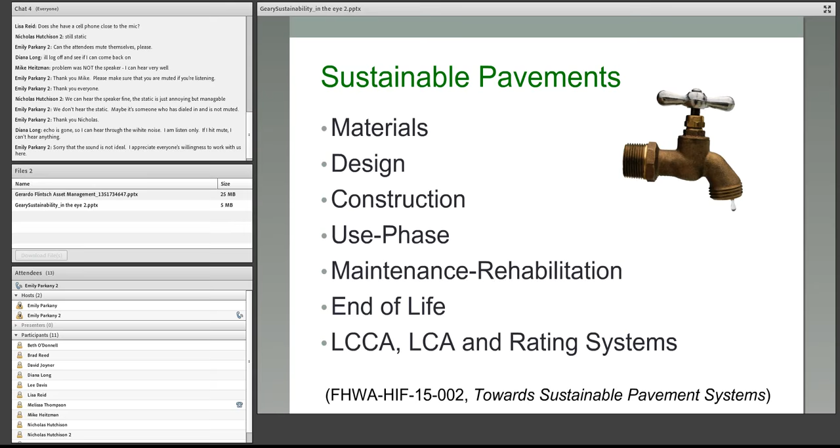This was something I thought was interesting, from chapter 10 on the future and environmental product declarations. I recently saw this in another presentation someone was giving in an asphalt arena, where they talked about UPC codes for materials in the future.

This is a concrete mix design and the environmental impacts for that design—looking at global warming, ozone, the whole environmental picture. As a materials person, I was a little concerned that they had only two lines for performance metrics versus over half a dozen lines of details and metrics for environmental issues. But this was just a snapshot—if you look at the full document, they do have the complete performance metrics too, along with more environmental impacts.

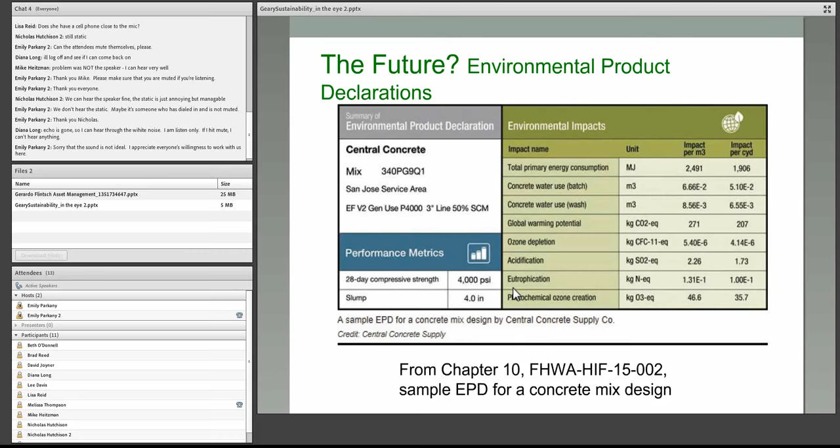Now I'm going to cover some examples. This is kind of like concepts according to Georgia, and I'll do this a little bit quick.

First, I think education and people coming up with new things, that's sustainable. The corollary is mandating specifics, which I think is detrimental. You really need to provide people options. Sometimes you've got to mandate things to get things done, but if you mandate options instead of just mandating one way, that's a better way to think about it.

We talked about how it can take time for sustainability, and then the context nature. When I took over the materials lab in 2000, we already had a standard saying you could use recycled concrete as a replacement for virgin graded aggregate base. But I couldn't tell where anybody had done it.

I actually saw a presentation somewhere else where a recycler was showing how to do it. You can't just recycle and throw it back in—you've got to process it, you've got to handle it correctly, there are steps that have to be taken. So I invited that recycler to come to our annual contractors meeting.

Just to kind of see if they would listen, I guess. And they did—boy, did they listen. The recycling increased that next year, and we were up to 500,000 tons. Now we're at about 100,000 tons a year, which is about 10%. For an aggregate-rich state like Georgia, 10% is pretty good—we have lots of aggregate, lots of good aggregate. We're taking a bite of that pie, and it was just based on education.

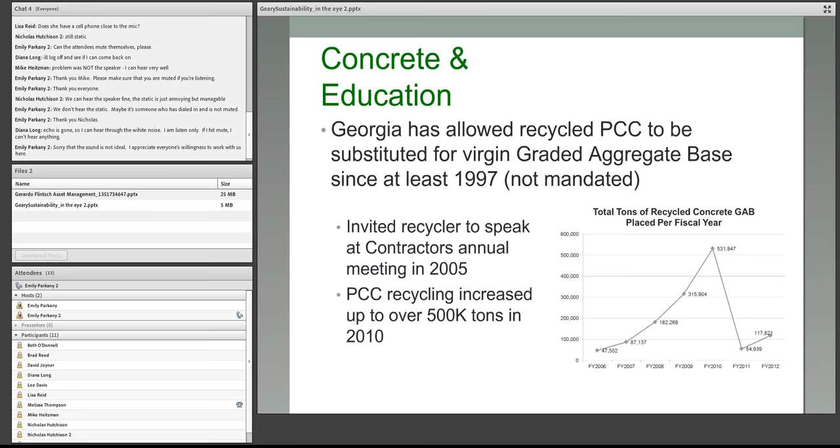Sometimes if you provide the contractors options, they'll come up with it on their own. On Interstate 16, they're out there right now recycling 100% of the concrete back into the shoulder pavement. We've never done that before in Georgia on an interstate. The contractor already had options for the shoulders, and they came in and requested this as another option.

We had the experience already with the concrete recycling on GAB. From what I understand, the project is going great. I'm actually going out there to see them next week to get a visit of it.

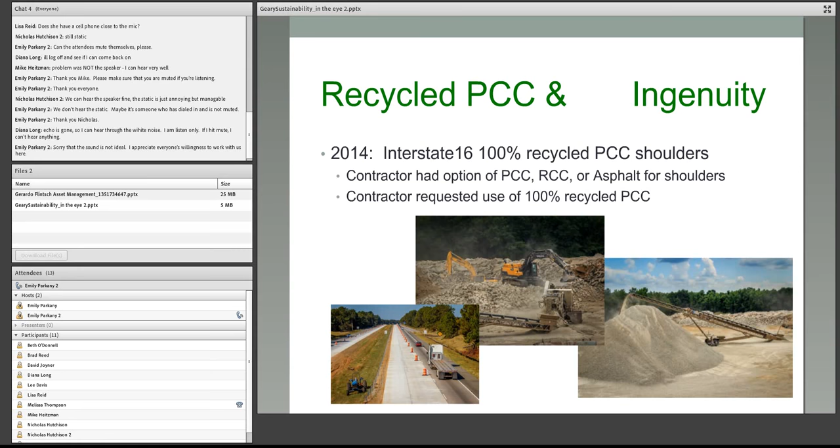Let's talk a little bit about time on sustainability. In 1981, I was doing some research on old interstates and found out that we actually put RAP in an interstate pavement back in 1981. I graduated high school in 1981, and I just retired—that's a long time ago. We've been doing RAP a long time.

We had a standard specification in '93, and then another 20 years later, in 2012—because what happened is when we started out, we were at 10 and 15% RAP. That was okay, but now as things got tighter and asphalt got more expensive, contractors wanted to put 20%, 25%, 30%. The same thought pattern that worked on 10-15% didn't work on that 25-30% RAP, so we had to tweak those requirements.

We were finding pavements that were cracking up within 4 years. We expect a minimum of 10 years for our resurfacing, but they were cracking up and we were having to resurface in 4 years. I don't know if it'll ever be fully sustainable—you're never going to reach sustainability. You've got to continually look at it and make changes to make sure it stays sustainable.

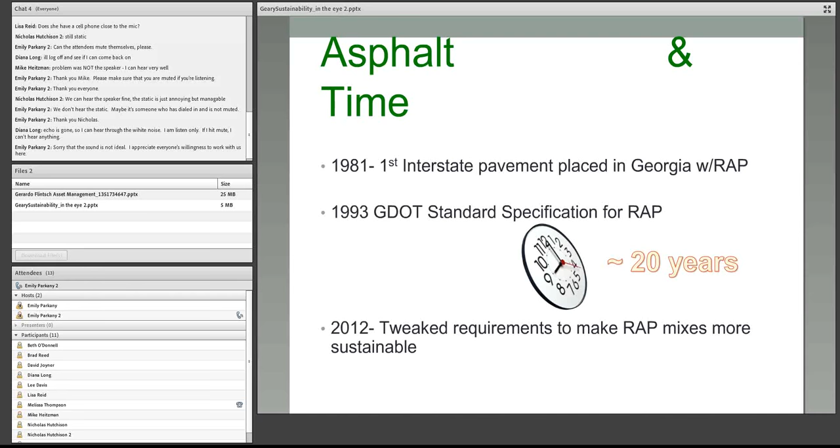Now, no money doesn't have anything to do with sustainability—it's actually a negative part—but that's what caused us to start using micromilling.

This is more of a context thing. In Georgia, conventionally on our high-volume interstates, we had a special mix called SMA, stone matrix asphalt, with a thin mix on top. In the past we would just mill off both of those and replace both. We got to saying, hey, we need to find a way to save some money, and with a conventional milling head, we weren't going to be able to just take off that top mix.

So we worked with the manufacturers and came up with this micro mill milling head that will just take off the surface mix, so we're reusing that SMA for another time. But if we're required on this project to check a box to get recycling, we won't be able to do that because it doesn't use any recycled material. We don't allow recycling in that top 1 inch because it's just too thin to use recycling. So that's the problem if you mandate something that has to be recycled, it can cause you problems.

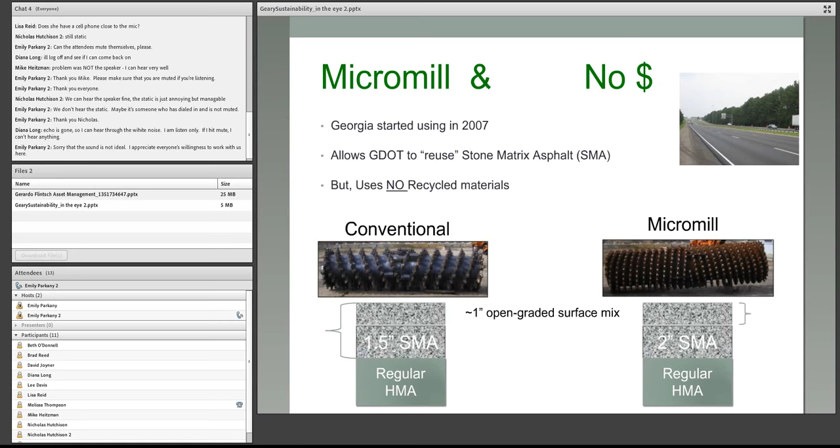Crumb rubber, that's ground tires, and this is another kind of a mandate thing. That picture, pretend that mud is actually asphalt, because that's what happened. When I took over the materials job in 2000, my predecessor had left me a picture from the newspaper where cars had been stuck in the asphalt because of a crumb rubber project. We had a really bad experience. I couldn't find the actual picture so I got close, but the picture itself is seared in the heads of the people that went through it. So sometimes when you mandate things and they go bad, it makes it even worse.

But in 2007, we had problems with polymers in our asphalt. The prices were just going crazy, out the roof. And we use polymers in a high volume. It makes the asphalt better than just regular asphalt.

So we looked at it again. This was another contractor that came to us and said, hey, we want to use this option because the polymers are so expensive, this will save money. So Georgia DOT placed over 500,000 tons since then. Now we're not just assuming it's going to work and be the same as polymer. We're doing testing. We've got research that's ongoing, looking at those original projects just to make sure that our assumptions that it is good are good assumptions.

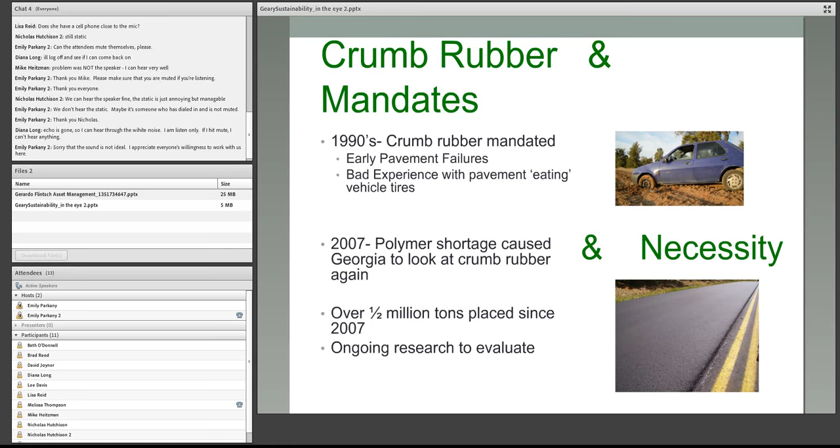You don't want to find out after you have all these roads paved that they only last 4 years. You've got to make sure that they're going to be sustainable. Another thing about crumb rubber is you've got to look at the details. I've heard some states say, oh, crumb rubber is better than what we use, much better, crumb rubber asphalt. Well, they're comparing it to regular neat asphalt. If you're comparing it to a polymer, it's a little closer comparison. So you've got to look at the performance and the materials of what you're looking at to say if something is better or cheaper or not.

All right, I said I would take you back to reality, and this is kind of my request as a materials practitioner and former DOT person. This is what the materials folks need. We need those vetted guidelines related to the environmental issues, and we need to get all those people together to make those decisions. Those are the hard decisions. But you can't leave the materials person to be the sustainability guru. They need the help, they need some input, but listen to them too.

And then options to fit the situation. I think it's always better to have options than to mandate something one way, especially since sometimes the industries want to get it mandated a certain way. The different industries have been known to go to the legislature and get laws made that mandate something a certain way, and that usually doesn't turn out good. And then trust them to make the right decisions once they have all the information and the input. Thank you.

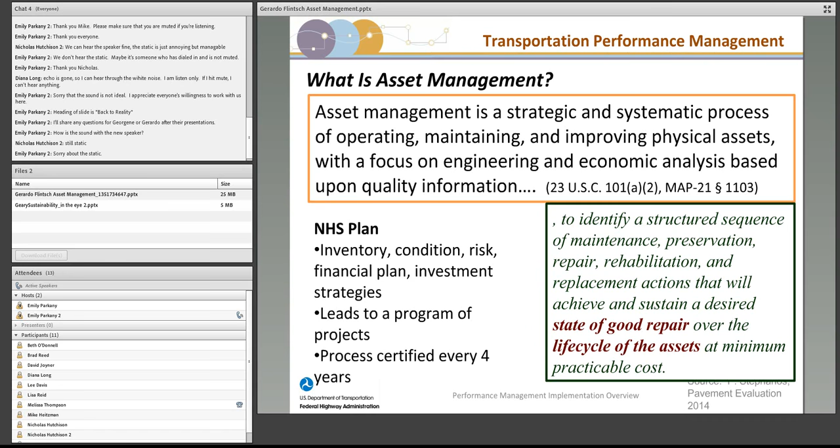There's another piece I added from the MAP-21 legislation that says this asset management really wants to identify a structured sequence of maintenance and rehabilitation, etc., to achieve and sustain the level of service that provides a state of good repair, at the minimum practicable cost. So we have three aspects: we have the service, we have state of good repair, and we want to do that at the minimum cost.

For that, I've been using over the years a scheme that says the heart, the base, the foundation of all the asset management system is a database where I know what I have. I need an inventory, I know the condition of those assets, I know how much they're used, and I also know what we need to do with them. Based on that, I use that foundation to support a series of decisions, a business process that goes basically at three levels.

On the strategic level, what I said is performance targets that we talk about first thing in the morning. And of course, that has to be associated with a budget. If I set very high standards, I will need more money; if I have lower standards, I will need less money. So I need to balance those trade-offs.

Then I need to go and make decisions of what I do with my assets at the network level. At this time, typically, I have systems to handle my pavements, my bridges, my signs, etc. A series of individual engineering management systems that, hopefully, if my asset management is mature enough, will be integrated into a decision-making process that considers both performance and cost.

And I would argue we also need to start incorporating sustainability into those decisions, including environmental aspects that will make our decisions more sustainable.

And then, of course, once you get a work plan with all these asset management network level tools that allow us to predict the condition, optimize our investment, and come up with a work program, I need to go and design each of these treatments, each of these projects in the work program, to be able to execute them.

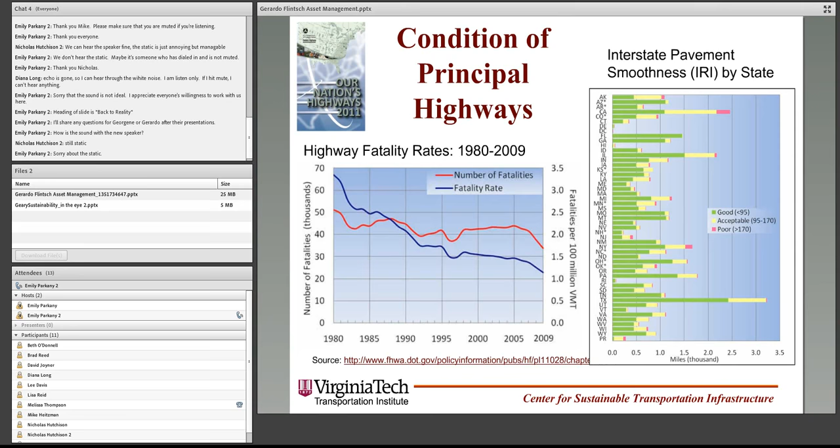That's at the national level. Most states at this point also have some performance measures that they share with the user at the state level. Virginia has a dashboard that goes all the way from road condition to project delivery and many different performance measures that they also publish in a quarterly report posted on the website.

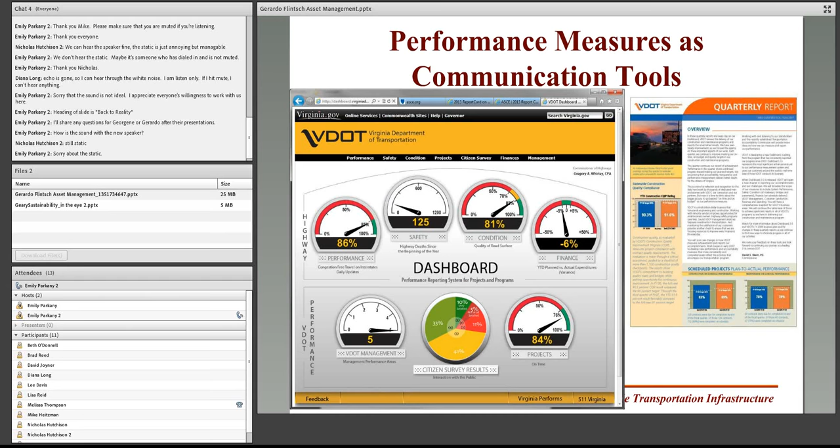So we have a series of goals that are somehow translated into something we can measure, and those measures are the ones we use to track our performance, how well we're doing in making our investments.

That brings us to the last concept: state of good repair. I was struggling to find a definition, and then I found this, and I adapted it a little: the state that results from application of transportation asset management concepts, where we balance economic and performance aspects, in which an agency maintains physical assets according to a policy that minimizes asset life cycle costs while avoiding negative impacts to service.

Again, I would argue we probably need an environmental component there too. And of course, it's hard to define by itself, but easy to define what is not a state of good repair. And if you believe an ASCE report, most of our infrastructure is in a state that is not in good repair, in a way. So the common themes are: achieving and meeting certain levels of service and performance for the users, performing maintenance, repair, and rehabilitation according to the policies we set so it helps us achieve our performance objectives, and reducing or eliminating a backlog of unmet capital needs.

The 3.6 trillion figure from ASCE may be too high, but it's in the right order of magnitude. So we have a big backlog in our infrastructure in general, and of course, that's what we try to address with asset management. I would argue all three of these concepts work together to help us align our decisions with our performance measures and performance objectives.

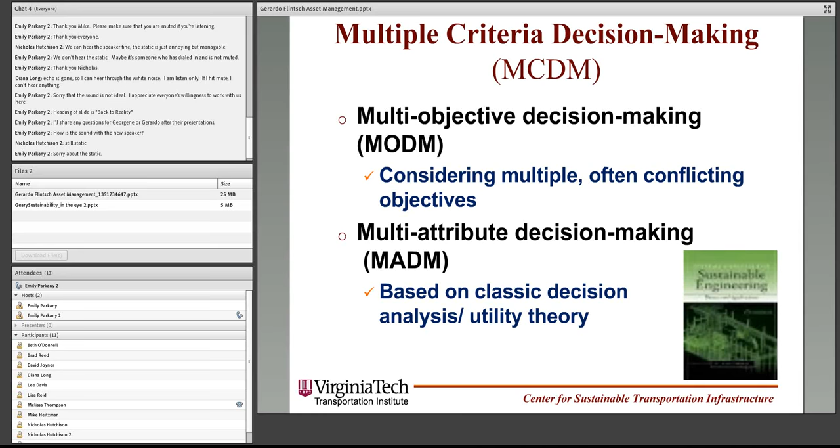So there's tools, and in particular, I'm going to focus on one to illustrate this. If you look at optimization, it's a decision-making tool that selects the best combination of treatments - where do we need to act, what type of facilities, bridges or pavements we need to fix, what type of treatment we need to apply, and when is the optimal time. I can set that to achieve a specific objective.

For that, I have operation research techniques I can use. And again, the main part there is I need to figure out a realistic decision-making process and come up with the mathematical models that allow us to model that.

And of course, if you really want to achieve sustainable transportation, I need to consider multiple objectives that reflect these three legs of the sustainability concept, the triple bottom line: economic development, ecological sustainability, and social desirability. I call this high-level performance, which I can then reflect in objectives, coming up with ways of measuring that - and I will have to do some trade-off.

Usually what happens is there's not going to be one solution that's better. What I have is a family of solutions that, in operation research terminology, is called a Pareto set of solutions that satisfies the constraints and gives a good balance between the different objectives.

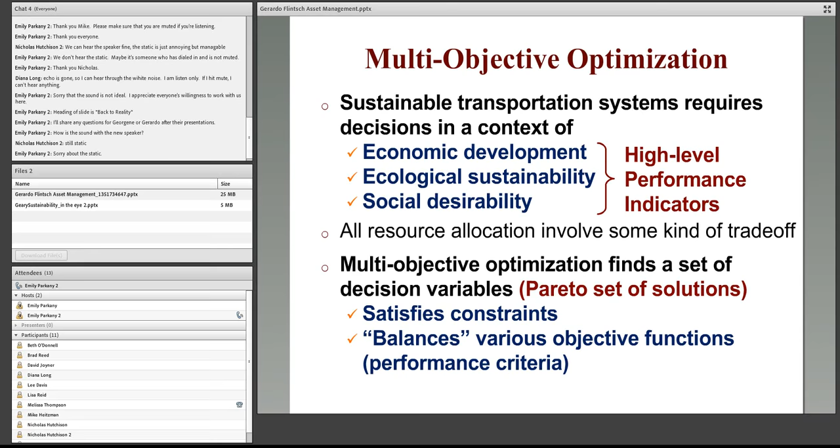If we go back to the two objectives we've been using traditionally in pavement and bridge management - maximizing the benefits or minimizing the cost. Of course, the optimal solution would be one on the top left side: we have the maximum benefits at no cost. Unfortunately, that's not something we can accomplish.

But if we apply different strategies, we're going to have different costs to implement those strategies, and those strategies will give us some specific benefits. There will be a group of those strategies that fall along what we call the efficiency frontier, and those are strategies that are somehow optimal.

If you compare strategy 2 and strategy 1, strategy 2 will always be better than 1 because it costs less and gives us more benefits. But if you compare strategy 2 and 6, it's harder to tell, because 6 gives us more benefit but it costs more. So all these solutions that fall on that frontier provide an optimal balance between the two, and depending on how much weight we give to benefit or cost, that will be the one we select.

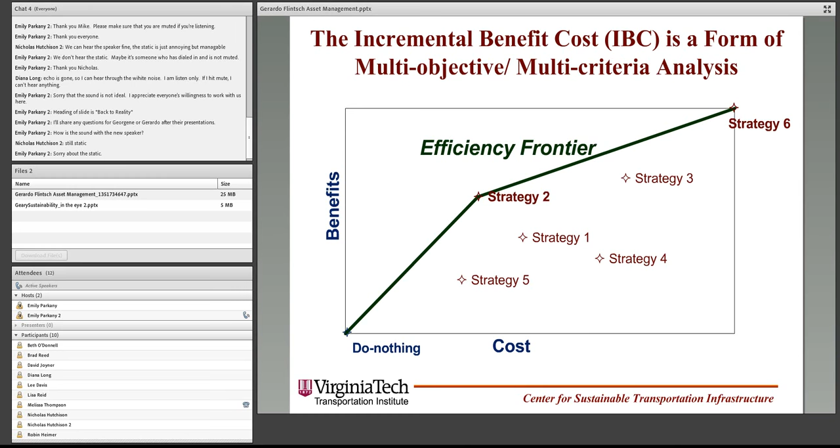In pavement management, for many years, we've used this concept of incremental benefit-cost to do an approximate optimization for our investment. Most of the pavement management systems we have right now, and a lot of the bridge management systems, use this concept. It's an easy way to figure out, depending on the budget I have, which strategy I can choose that will give me the optimal benefit for that level of investment.

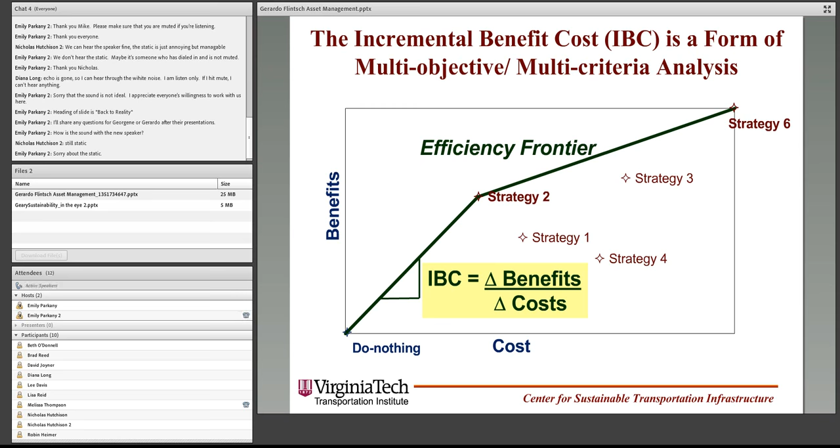So that brings us to: how do we apply that? For this, I've chosen three examples. The first one is a network-level example. If you look at the plot I'll show you, Filippo did his PhD looking at how we add environmental considerations to this decision-making process - he called it eco-efficiency values in a more comprehensive decision support system.

So now instead of the two traditional indicators, cost and benefit, or performance, what about if we add the environment and then use a similar approach, a multi-attribute optimization, to come up with the optimal strategy? We said, well, if we use cost as an indicator of economic development, performance is a level of service that affects the social aspects, and I'll add environmental aspects as the third dimension, and we try to balance them.

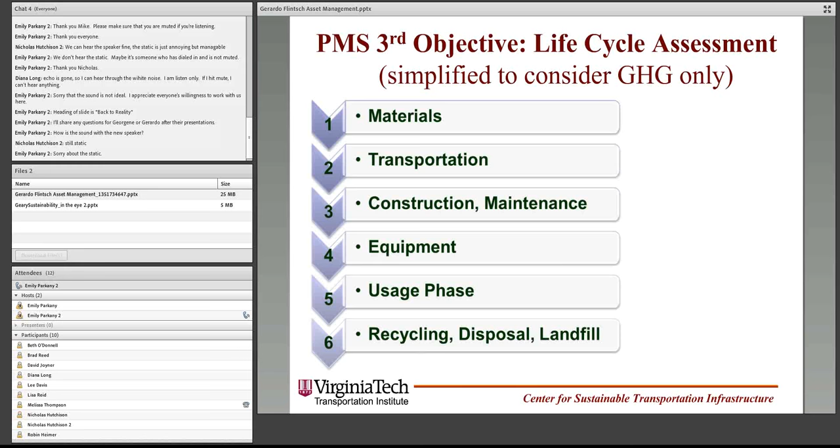For the environmental aspect, he did a simplified life cycle analysis where he only considered greenhouse gas emissions. You get the various steps in the life cycle of the pavement, including the use phase, to develop a carbon footprint tool, a very simple tool that we use to assess the performance.

So then you can check your different alternatives each time you do some project. One of the things we did in this case, well, we were going to consider the use phase, but we didn't - we incorporated that in the next example I'll show you later at the project level. So he did this, and of course each time you have construction, there will be some emissions generated, so you can minimize the emissions.

So what he looked at is, instead of having a two-dimensional plot with two things, now we have three parameters to consider, and we have an ideal solution that has no cost, or the minimum cost, the minimum environmental impact, and infinite performance. Just to make it representable in an easy way, he used the inverse of the performance to plot it. But again, the idea is that instead of having a curve that gives us the Pareto solutions, in this case we have a surface of solutions that are all optimal in a sense.

We cannot improve one of the performance parameters without hurting the others. What we need to do is measure some type of distance between this surface and this ideal point by weighting the different parameters, and that will give us the optimal solutions. You can set this weight a priori or a posteriori - there are different ways of doing that. But that's just one example.

And of course, you could add more objectives, and then you cannot represent it graphically, but you can still use the same concept of an efficiency frontier with different elements.

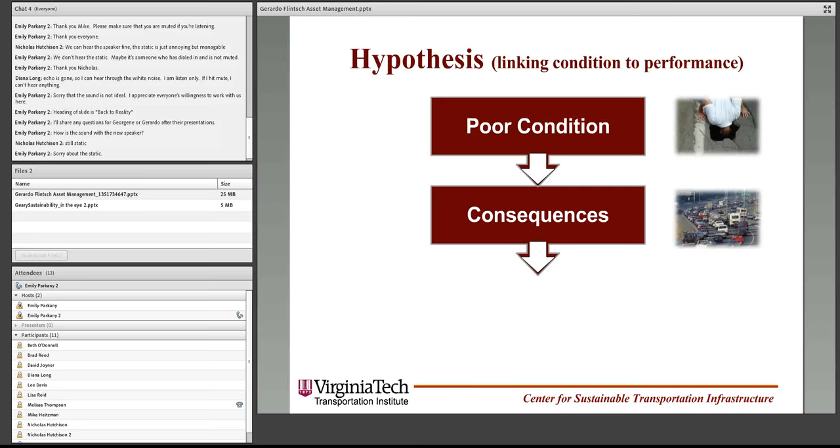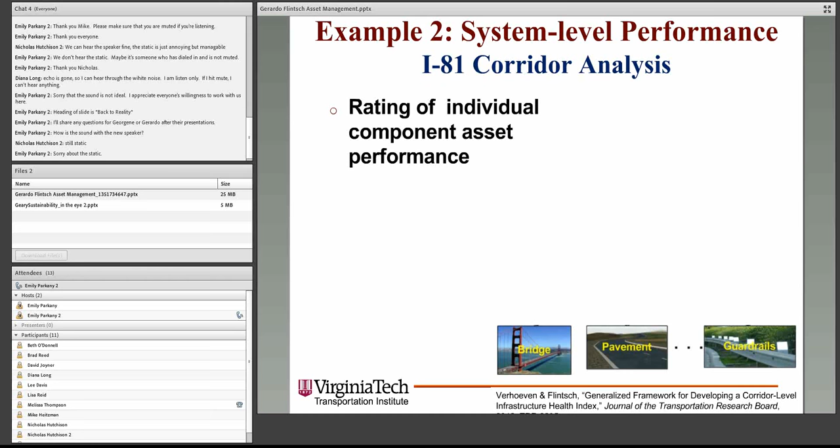So we did a case study, and there were some master students who worked on this, which was used by another student, Mohammed, as part of his PhD later on. But the idea is you can rate each of the individual assets based on various parameters related to functionality, condition, sustainability, etc. Then you can aggregate those indicators at the corridor level and at a higher level.

For example, we looked at the database in I-81 in Virginia, and we selected 50-mile long segments just to illustrate this. So what data do we have for pavements? We have IRI, rutting, and cracking. For bridges, we have the element value. Based on that, we could figure out the structural and functional condition of those by weighting these different elements and came up with some type of indicator that we can combine into a pavement health index, which we then integrate into a corridor health index, and we balance it.

Then what Mohammed did was use this information and say, well, what about if I look at a very simplified network, with little segments of corridor, and look at the distribution of how much I invest in pavements and bridges and how that impacts my system - my indicators for pavements and bridges and then the overall corridor. Based on that, you can figure out an optimal allocation that gives a good balance between the two. That gave us about 75% investment in pavements and 25% in bridges.

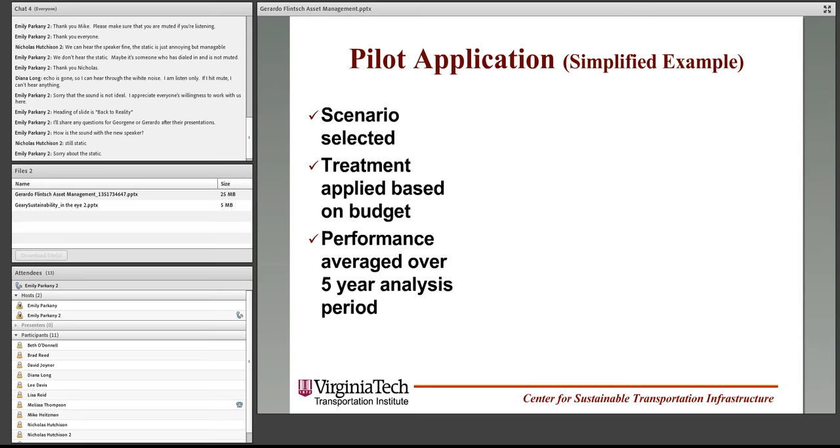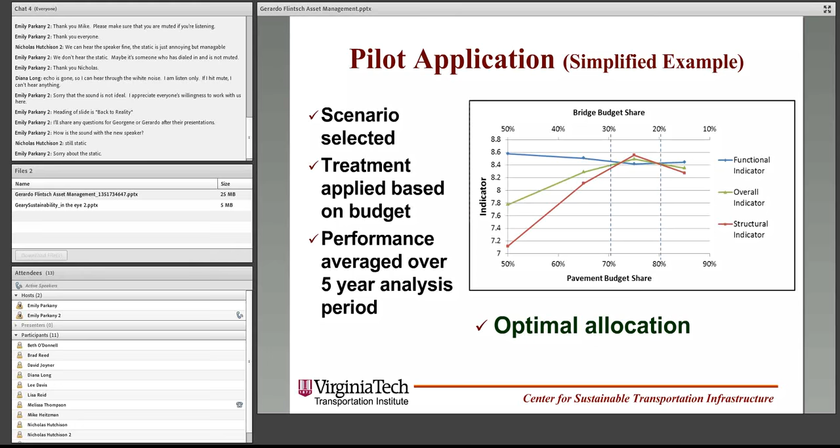Again, consider the two aspects: functionality and condition. For structural condition, you can use other parameters that may shift these. The risk of losing a bridge would be much higher, so we may weight it differently because of that.

He went ahead and said, if we make this more general, and look at road conditions, bad road conditions will affect capacity and risk of collapse. That creates traffic detours, reduces network efficiency, increases travel time. So I can use those parameters to see network performance and vulnerability, defined as how far performance moves from the undisrupted state, and look at the impact of decisions on various network measurements.

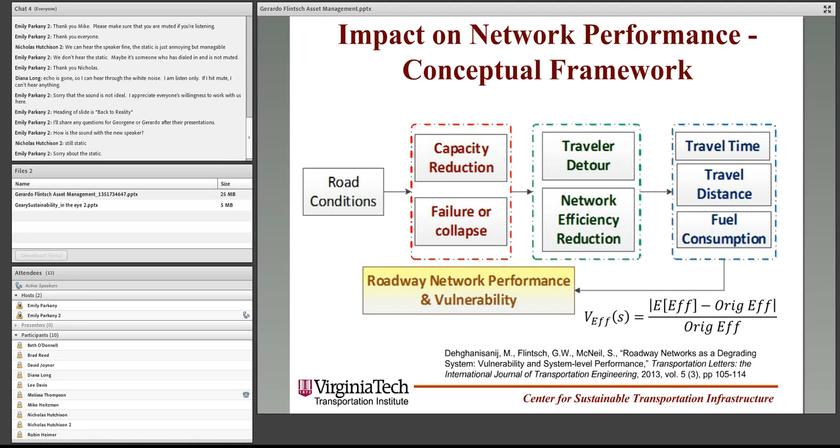Again, that's more at the strategic level. Finally, the last example is much more down to earth. We had another student looking at how to do this at the project level, balancing performance, cost, and environmental impact.

We looked at a project we contracted a few years back in Virginia where we compared different recycling techniques: cold-in-place recycling, full-depth reclamation, and cold central plant recycling in one project. It's actually one of the examples used to illustrate good practices in sustainability in the rating system.

The idea is we compared a life cycle cost analysis. Joao Santos has been working on this, a dual PhD student from the University of Coimbra and Virginia Tech. We compare three things: recycling-based rehabilitation, traditional rehabilitation reconstruction, and corrective maintenance.

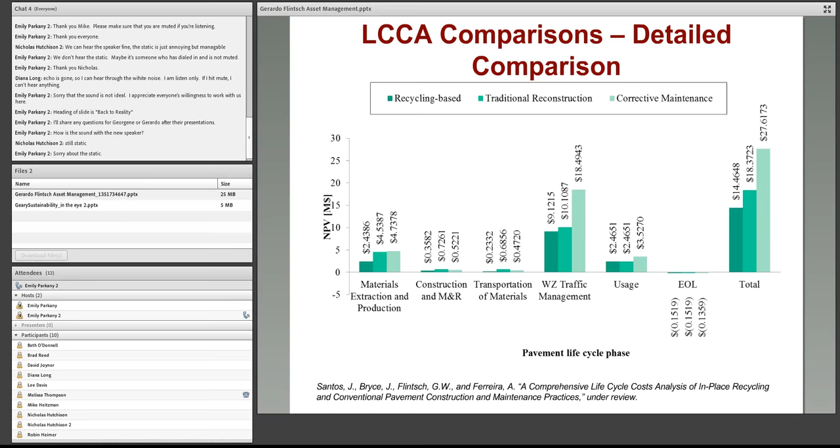With the recycling, the life cycle cost over 50 years was reduced to about half of what it was originally, and it was significantly about 20% lower than what you get with traditional rehabilitation. So it was a cost-effective alternative, and it also produced significant benefits.

Significant reduction in transportation because we don't take materials out and in, and also significant impact on the use phase, where we incorporated the better condition of the road translating into significant reduction of gas consumption of vehicles driving on that road. That's the most significant impact of road investment: how much emissions you save because the roads are in good condition.

So just to conclude, asset management is a key function for most highway agencies that have adopted this concept. It helps align our preservation and renewal programs and budgets with user expectations, and align it with the performance goals we set for our system, network, and programs. Sound asset management is needed to provide sustainable highway infrastructure systems. I think that's all I have. Thank you.

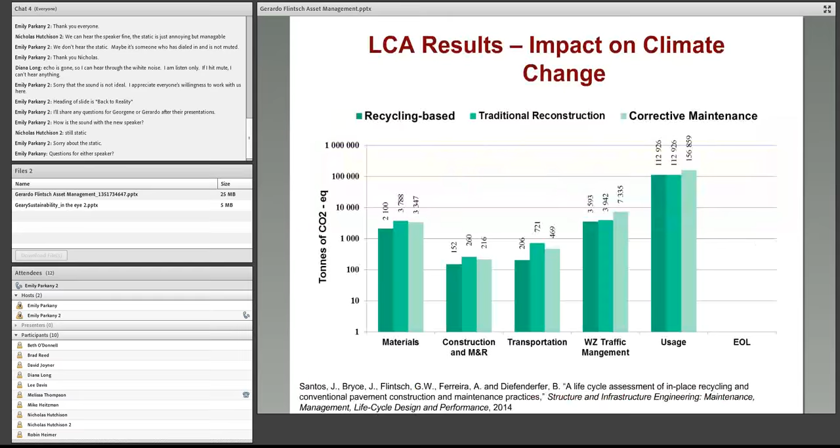I wonder if you have a few thoughts on that. My own observation was, since we have dollar equivalent numbers by year for carbon dioxide anyway, could it be an easier analysis to do and explain if we could try to go directly to the dollar valuations instead of the weighting criteria?

That's a very good point, and that's one of the questions that always come up when we have this discussion. A few years back, we had a workshop we hosted that we got people from Europe and the U.S. to talk about sustainable pavement, and that was a big discussion that came out. Why don't we make this a uniform unit in dollars? Some of the more purist folks that deal with life cycle assessment, they really don't like that concept.

And again, it's a practical way of doing that, so it's a different way. Again, you are doing it anyway because somehow you need to weigh those. An option would be maybe to translate it. What we do often in life cycle cost analysis, for example, is we look at the cost from the agency, the user cost for the users, and then we give a little less weight to the users because this is not a direct cost. Maybe something similar we could do.

But I agree, maybe the way of doing it is bringing everything to a common scale so then we don't have to worry about this. This is another way of looking at that if you don't want to use that. But yeah, that's a discussion that comes every single time, and I don't know which one is better, I don't have a big feeling for it in a way.

I know the World Bank, for example, in the HDM4 model, they do get emissions translated into dollars, and they put it as part of this in the same unit. So at least, and that's very commonly used in developing countries for assessing projects.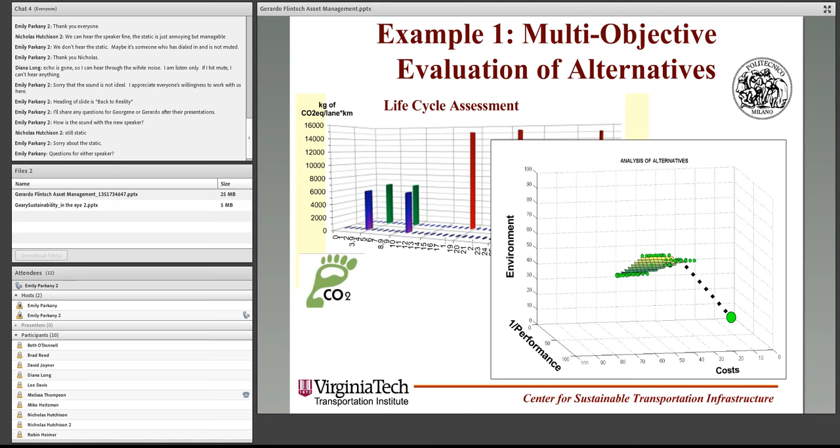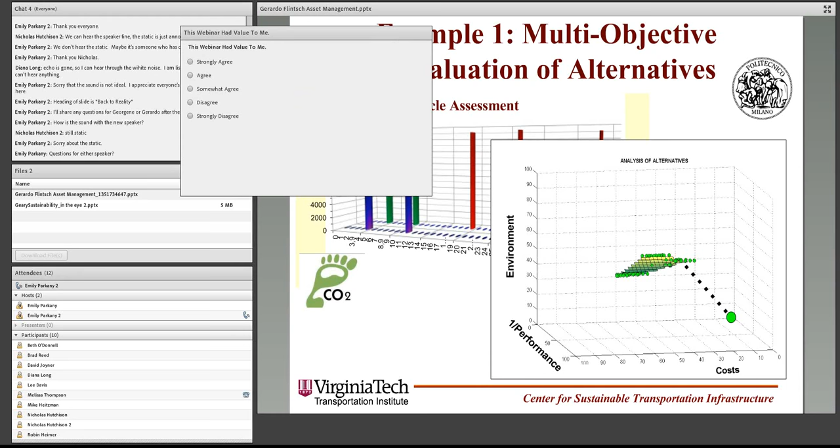Eventually it will start to degrade, but that's another good indication that there's a good chance it will work well in the long term. There's also a lot of experience in other countries and states showing that it does work quite well. It doesn't work in all conditions, though, you have to select the right application for the right problem.

What we're trying to do is see that it can be incorporated as another tool in the pavement management toolbox, another rehabilitation strategy. There seems to be quite a bit of agreement. What we've run into a little is that some of the more traditional industry isn't too happy seeing too much recycling, because it means they have to reinvent themselves. That's been the main obstacle in the state, trying to break down the business model used to mill and replace the surface of the pavement. I guess that's probably a very common problem everywhere.

Yeah, I actually have a quick question. You both addressed a lot about recycling materials or reducing the need to replace as much as possible. But I noticed, at least in some of the pictures, some of the equipment to recycle looks very expensive and unwieldy and uncommon to find or have produced. I'm curious if any of that was factored into the cost, because to build brand new roads, there's equipment readily available for that all over the place, but to do these complex operations, that's kind of the image that's burned into my mind.